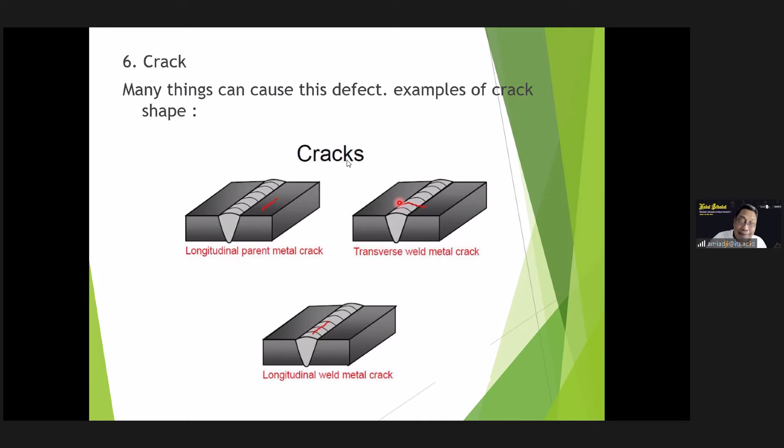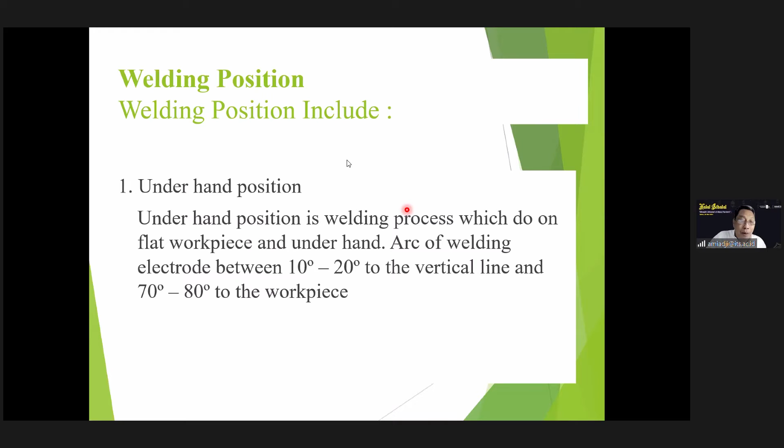Posisi pengelasan itu adalah pengelasan underhand position, berarti benda kerjanya di bawah, benda yang akan dilas di bawah, kemudian elektrodenya di atas. Ini underhand position.

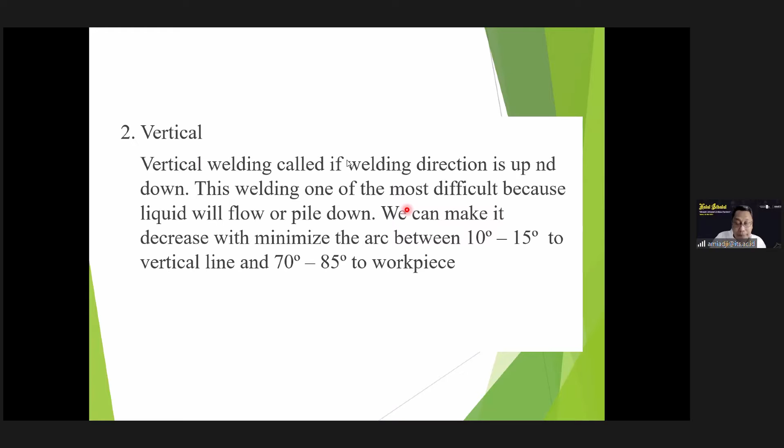Ini vertikal, ya kita vertikal, ngelas vertikal. Horizontal, ngelas horizontal. Kemudian ada overhead position di atas kepala.

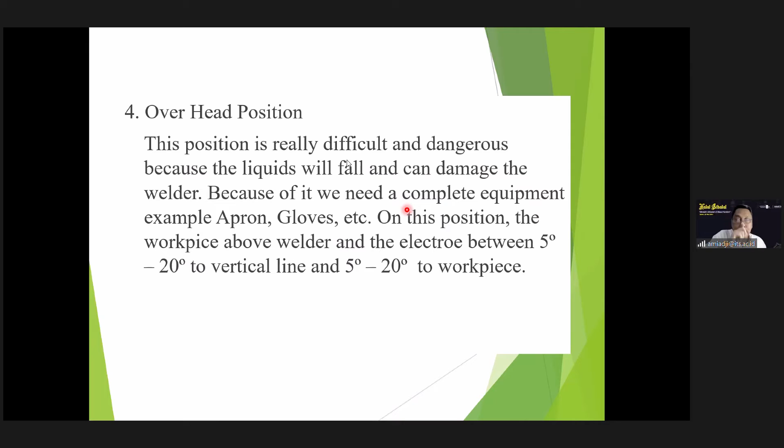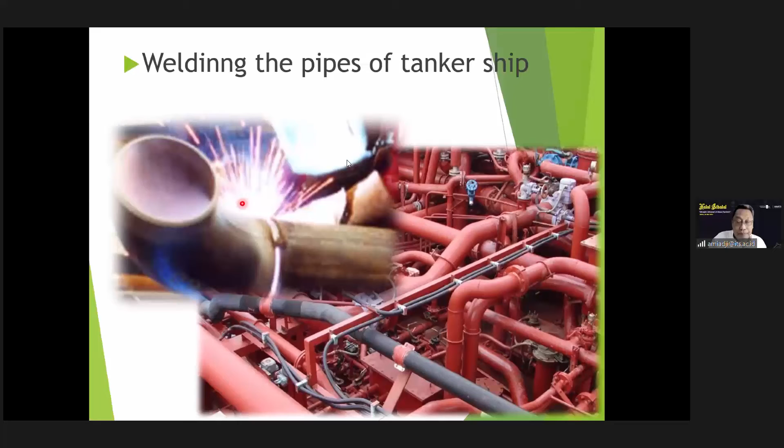Panjang lengan. Nah, kemudian ini pengelasan di bidang marine, di piping-piping. Ini adalah busurnya. Ini ngelas di badan kapal.

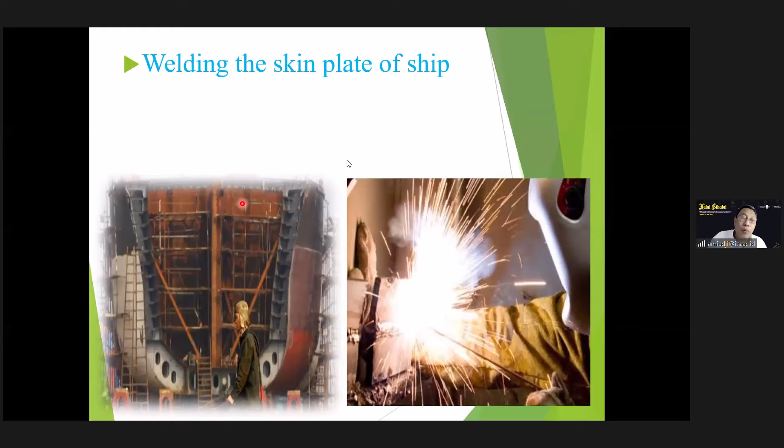Hampir 90% kalau kita menghubungkan material itu biasanya dilakukan dengan cara pengelasan, di kapal ya. Yang lainnya itu bisa dihubungkan dengan apa? Dengan paku keling atau dengan mur baut.

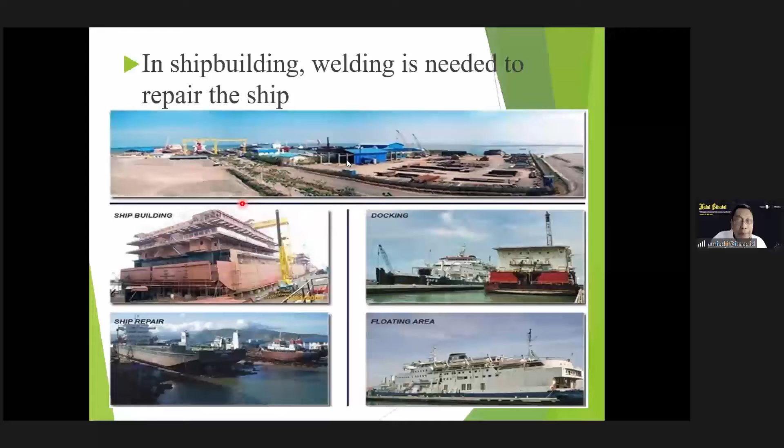Ini di offshore. Ini di kapal. Reparasinya ini. Ada yang mau tanyakan?

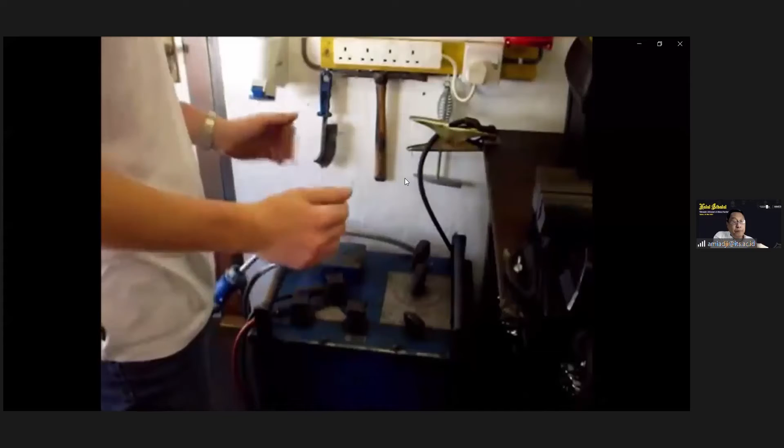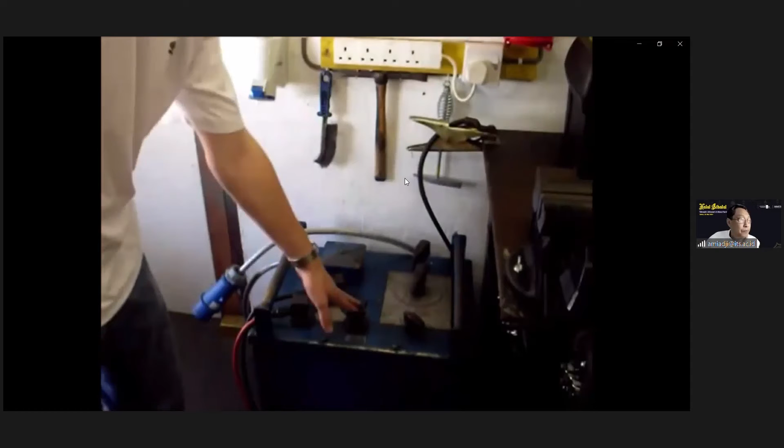Showing you the basics of manual metal arc welding. Now, the most important part of any welding installation is obviously the welder. Now, this model here is an Oxford oil-cooled welder. It's got an output of 250 amps maximum and can accept an input of either 230 volts or 400 volts across two phases of a three-phase supply. It's got a 50 volt output and an 80 volt output. I tend to use the 80 volts because it just makes it that bit easier to strike up.

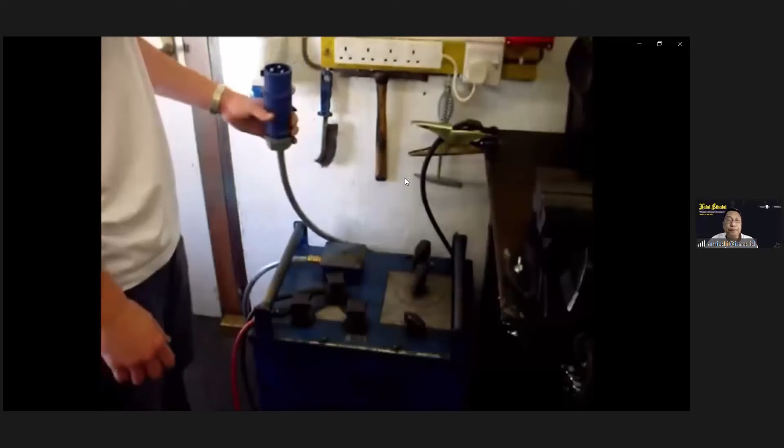Of 250 amps max. The most important part of any welding installation is obviously the welder. Now, this model here is an Oxford oil-cooled welder. It's got an output of 250 amps maximum and can accept an input of either 230 volts or 400 volts across two phases of a three-phase supply. It's got a 50 volt output and an 80 volt output. I tend to use the 80 volts because it just makes it that bit easier to strike up. Now, the welder works as follows. It draws its supply here from the mains.

Ya, kamu sudah tahu gitu ya, tetap minum aja. Ayatullah Rianto. Absen. Hadir, Pak.

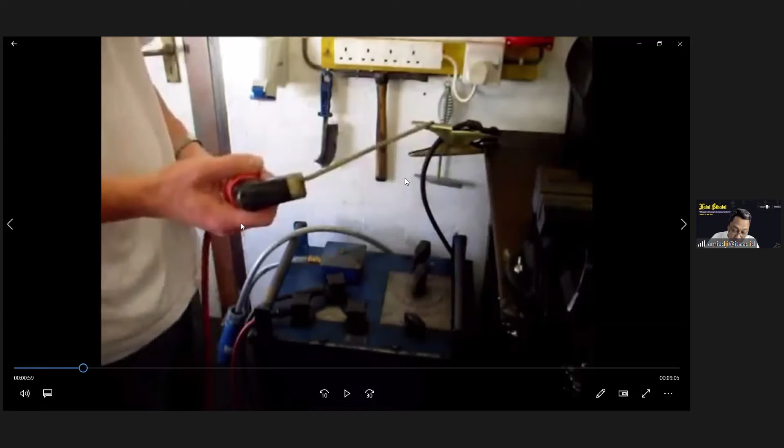Yang dipegang ini apa? Tidak bisa. Ahmad Fat. Penjepit elektroda, Pak. Hadir, Pak. Apa? Penjepit elektroda holder, elektroda. Ya, jawab ya benar. Jawabnya holder, Pak. Harus cepat, jangan lama-lama ya.

Live. This is a welding rod, and this is what you use to strike up on your workpiece. It's comprised of a solid inner core of typically 2.5 or 3.2 millimeters. It's got an outer coating on this thing which burns away and produces a shield gas. Now this is important as it stops oxygen getting to the weld and stops the weld fouling up.

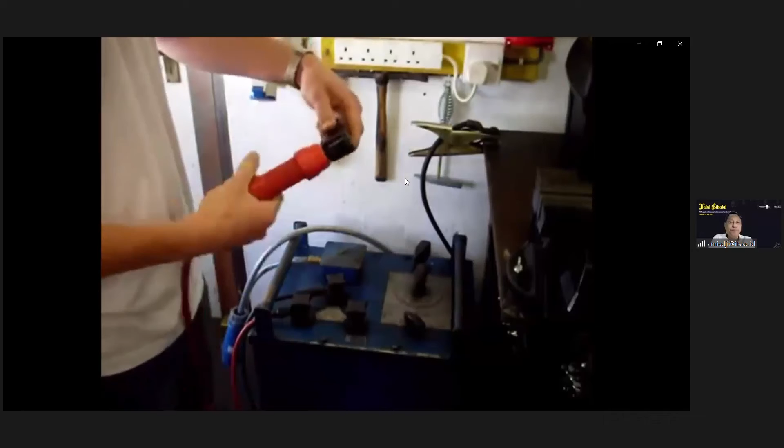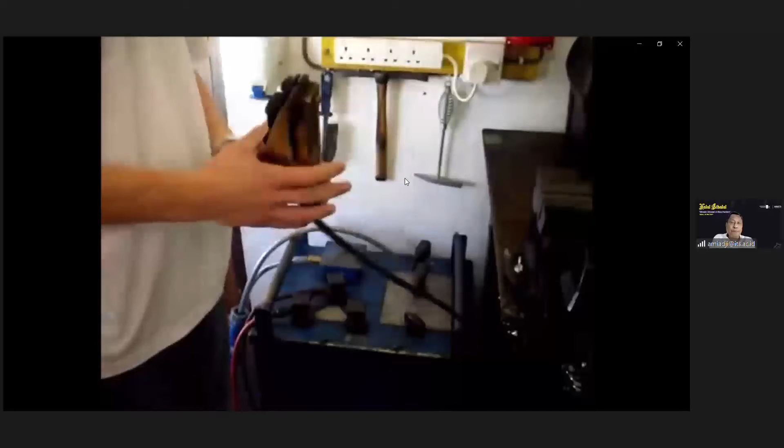The workpiece obviously then has to be grounded to complete the circuit, and that's where your earth clamp comes in. Your workpiece always has to be connected back to the...

Hamad Fatu Jundi. Hadir, Pak. Yang dipegang ini apa? Yang dipegang itu bukannya workpiece connection ya, Pak? Itu klem gitu. Iya, klem yang biasanya dihubungkan kemana? Dihubungkannya ke workpiece-nya atau benda kerjanya, ke mejanya.

Iya, table. Your earth clamp back down here, back down this black wire, back to the welder, which completes the circuit.

Now, there are a few tools that you need to start welding. Obviously, you need a welder and you need a suitable power supply to power it. You obviously need two leads, a ground clamp, and an electrode holder. You also need different types of electrode, which we'll come on to for working on different materials.

The most basic tool of all, though, is a welding helmet. Now, this one is the most basic type. This one has a liftable and lowerable screen on the thing. You can lift it to see what you're doing and lower it down to do the welding. You can get more fancy ones that are light activated and will dim automatically when you strike up. Those welding helmets tend to cost in the region of £8 to £10.

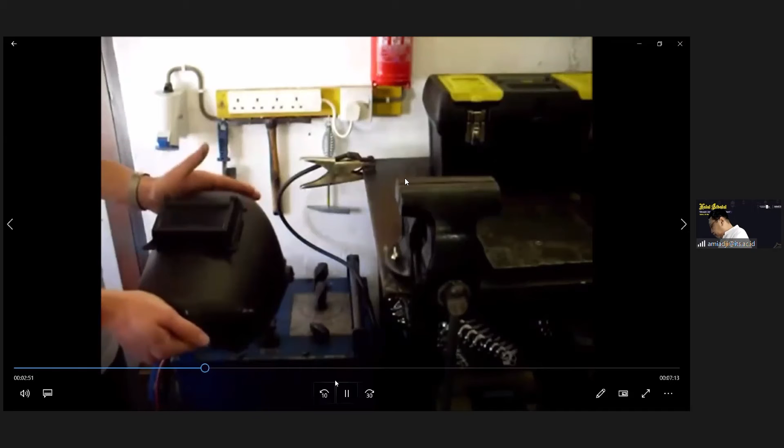The more expensive automatic ones tend to be around the £80 to £100 mark for a decent quality one. You'll also need a wire brush, used for cleaning up the welds after you've chipped off the slag.

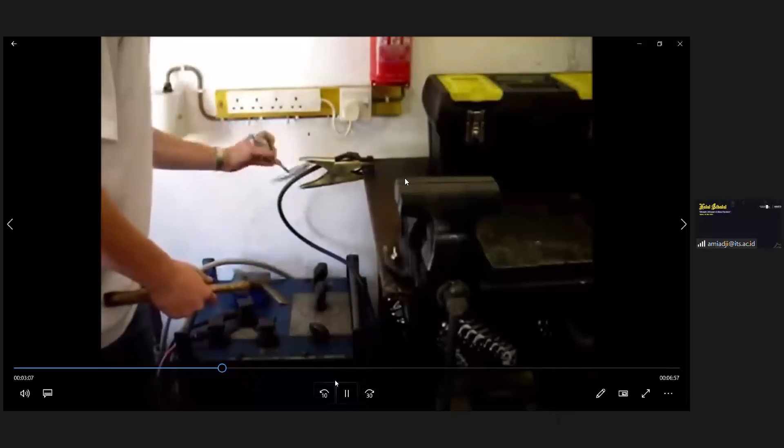Now, chipping hammers you will also need. I have two here, a wooden handled one and a metal sprung handled one. They both have their advantages and disadvantages, it doesn't matter which one you have. This one's easier for heavier duty materials, it's got a bit of weight in it, and this one's handy for getting into small crevices if you're doing a fillet weld or a butt weld.

You will also need a suitable place to do your work. Ideally, a metal vise on a metal bench is the best solution. As I said before, you can ground the bench and ground the vise. You only have to clamp your work and you can strike up straight on it.

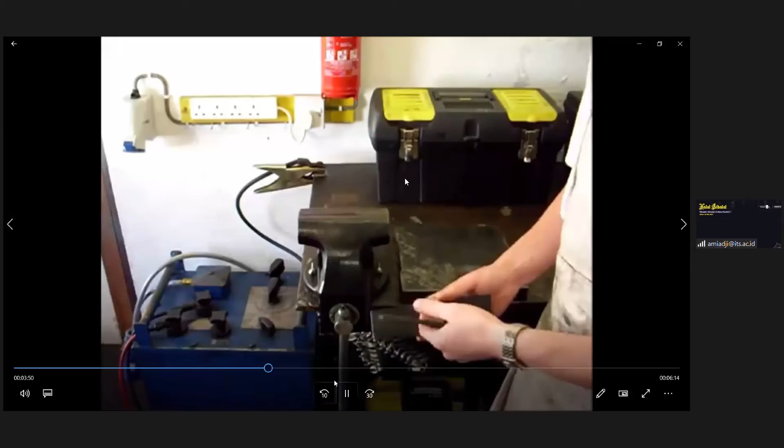Now, the first thing you want to do when you come to weld is look at the material. This is 1/8 inch steel, nothing special, just plain mild steel. Say I wanted to fillet weld these two together here, the type of rod I would use will probably be a 2.5mm E6013 rod, such as this one. I have a selection here.

I don't know whether you can see this on the camera. That is a 2.5mm rod here in my right hand. That is a 3.2, and that is a 4mm rod.

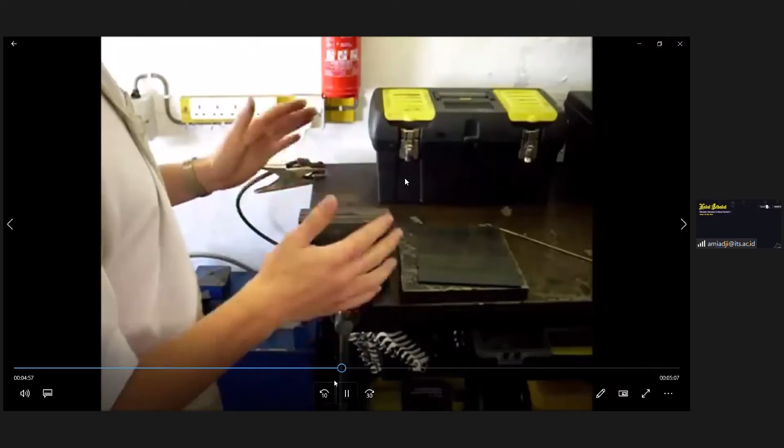The main two things that determine the current are the thickness of the material and the size of the rod. For something like this, I would probably choose around the 110 mark on my welder, and I'm going to set my welder here to 110 amps. The basic thing is you should try it and see what it sounds like, and experience will show whether you need more or less current.

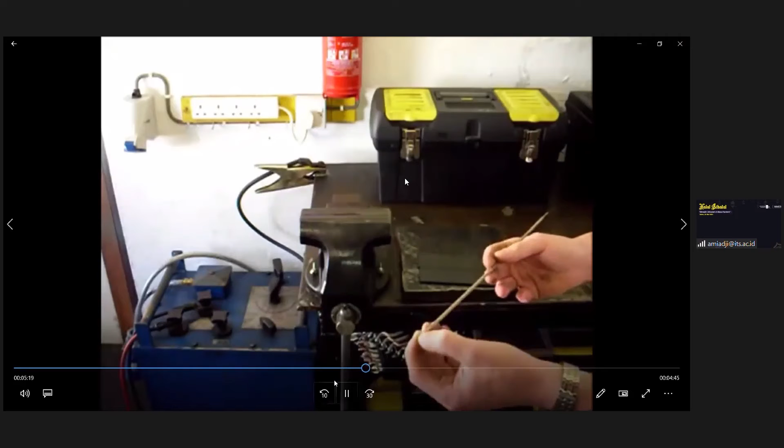Now, I don't want to bang on about safety, but when you weld, when the flux burns off around the rod, it does give off some quite nasty fumes. So you want to make sure there's an adequate flow of ventilation around the work area. Not too much, because you don't want to blow away the protective gases that shield the weld from oxygen. But if you're in a workshop like I am, I've got two big double doors open behind me here out of shot. You want to make sure there is some sort of ventilation, and you don't do it in too confined a space.

Once you've selected your rod, you want to take your electrode holder, unscrew your old electrode, and insert the correct size for the material you're working on, in this case the 2.5 rod. You want to place the electrode holder down, and note that if you place it down here on the grounded bench, when you plug the welder in, make sure it isn't switched on. So I'm checking here that the welder is switched off. I'm now safe to plug it in.

Check the connection is secure. I'm now going to take my welding mask, that can go on and be adjusted. And now you're ready to switch on.

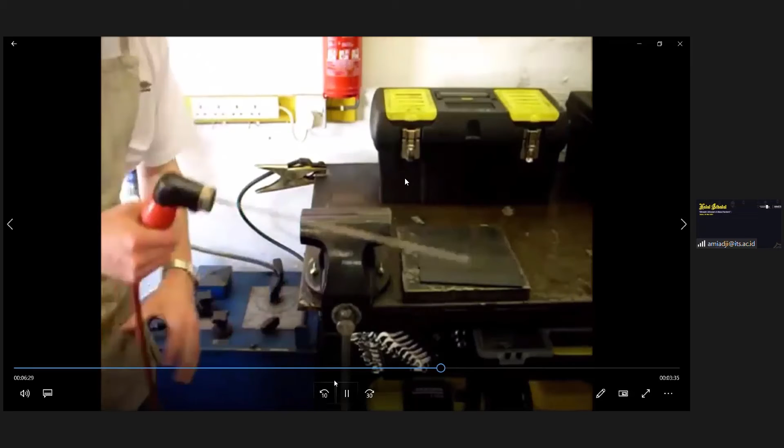Now, the basic technique for doing a fillet weld is to have the workpiece directly in front of you, and you want to always weld with the rod coming back towards you. You want to flick your wrist like that, and keep the electrode at about a 45 to 60 degree angle, always welding coming back towards you in a straight line. Now, I can't show you because I can't turn down the light enough on the camera, but I'll show you the results afterwards. You can pick up the noises on the camera and tell whether the current is too high or too low, with experience. So here goes.

Now, don't make the mistake of putting the electrode down on the bench, because remember, the bench is grounded. Switch the welder off first. Now you can put the electrode down.

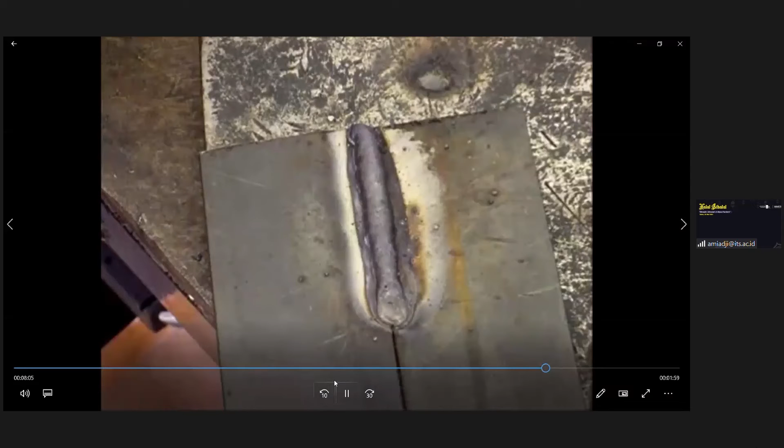Now, as you can see here, the weld is covered with slag. Now, you need the chipping hammer here to break the slag off. Here's a little technique to knowing how good the weld is: the slag should easily break off. It shouldn't have to be beaten to hell to break the slag off, it should be a couple of light taps to break it off.

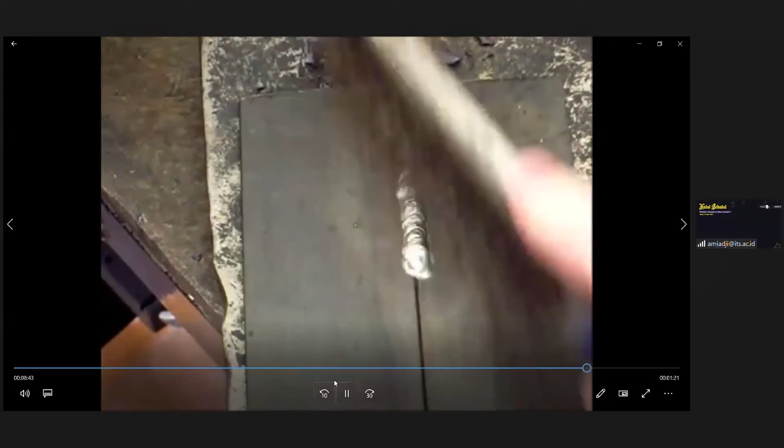The slag should take very little to break off if the weld is good. Now you want to take your wire brush and just clean it off, and there you have it, one fillet weld.

I hope you could hear on the video, but that's about the right sound you want for the current. You can tell the current wasn't too low because the weld didn't bunch up. It's a fairly even coating here, and there isn't too much spatter.

These little pimples of metal are called spatter, which is what's thrown out if the welding current's too high. I hope that's a good explanation for you on welding, and if you've got any questions, feel free to ask. The welder struck up very easily in the video. You shouldn't find that the electrode sticks to the workpiece.

If it does, the most common cause is a bad ground, which means the path of electricity back to the welder isn't good enough. This piece is resting on the work surface and has quite a bit of surface area, but always check the connection to the ground and your connections on the welder if the electrode starts to stick to the workpiece and it's hard to strike up.

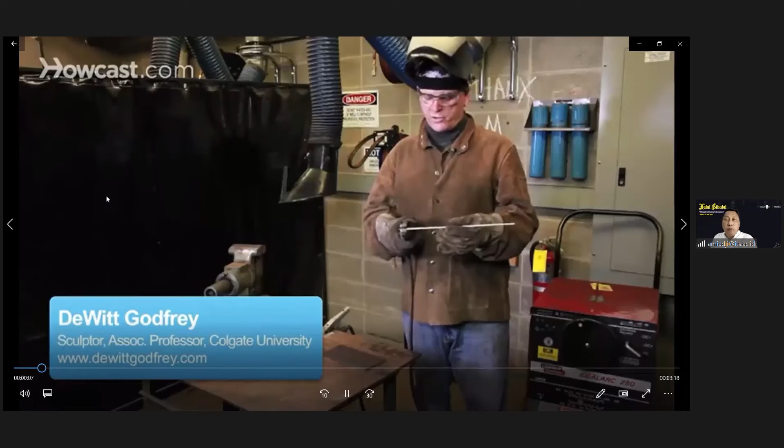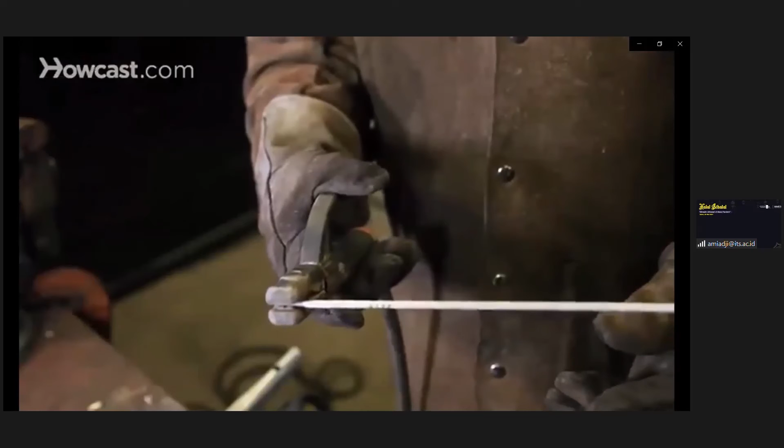This welding rod fits into an electrode holder, which is insulated and allows the operator to safely hold the electrode without danger of receiving an electric shock. The rod can be positioned in the holder in a number of different ways, depending on operator preference or the position of the work being welded.

When the welding machine is on and the ground clip is connected to the steel table or to the work itself, anything metal on this table is now charged. When the electrode makes contact with the work, it completes a circuit. The electricity flows through the electrode holder, down through the work, and back out through the ground clamp back to the welder.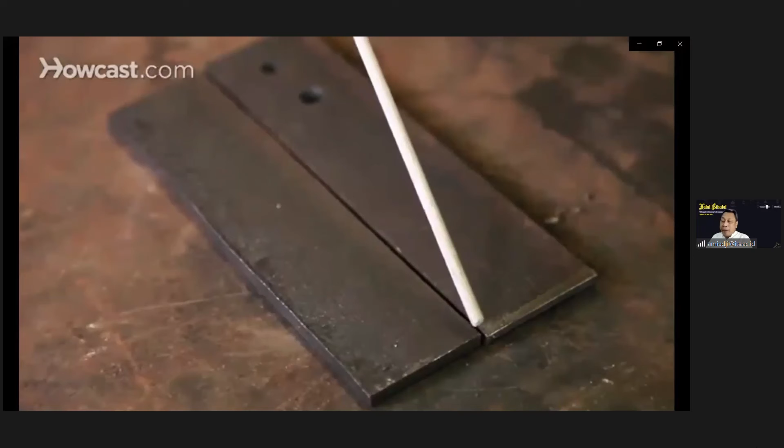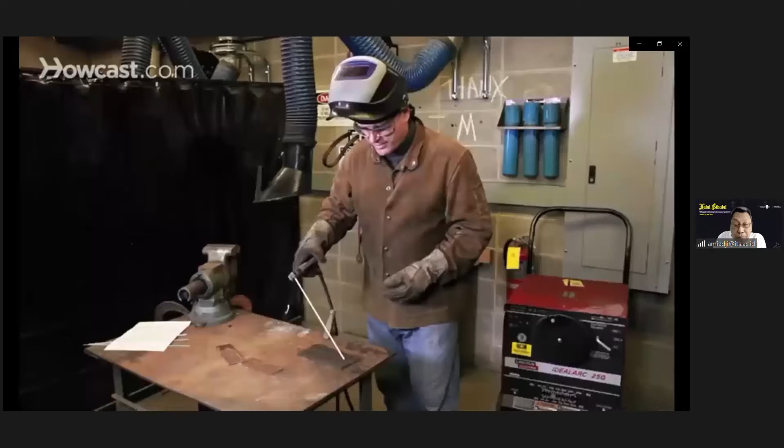When an arc is struck, a common pool of molten metal is created between the two pieces being joined. Into this, the melting alloy center of the welding rod is deposited, completing the weld. One thing to be careful of, as you're...

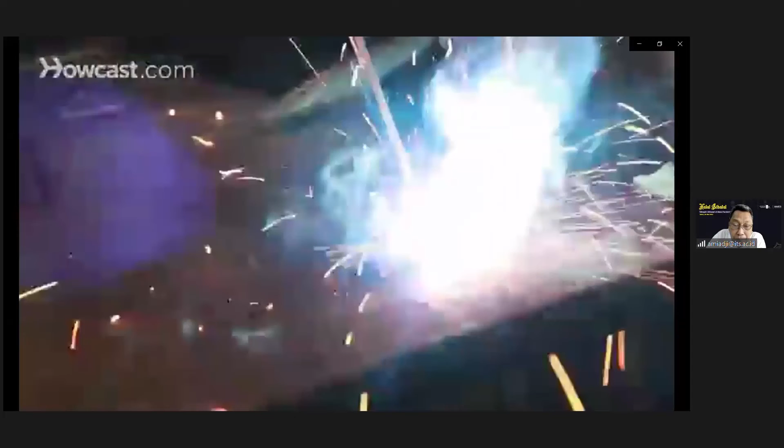Okay, hoods down. After striking the arc, I create a nice even pool of molten metal. You'll notice that the tip of the welding rod stays very near to the arc puddle, and that I'm also slightly wavering the tip of the electrode back and forth. The idea is to heat both pieces of metal evenly as the filler rod is being deposited.

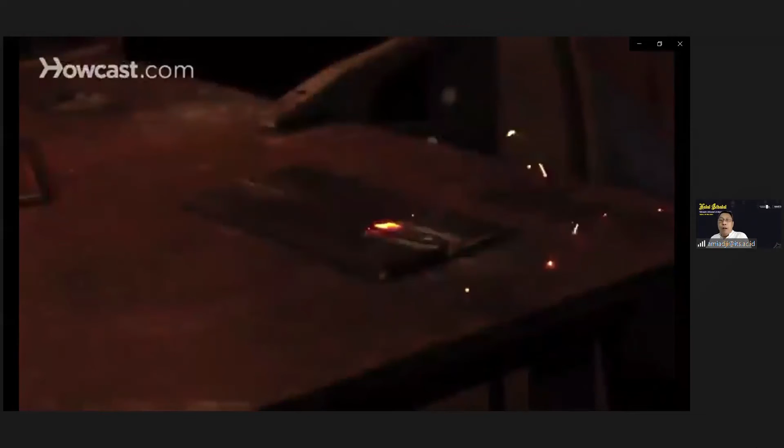Once you've completed your arc welded seam, you'll notice there's a blue-black residue on top of the weld. This residue is a byproduct of the burning flux. It needs to be cleaned away from the weld. You can do this with a chipping hammer and wire brush.

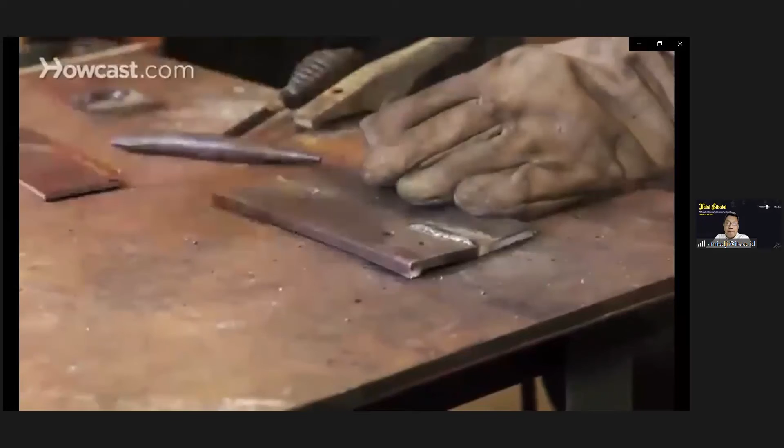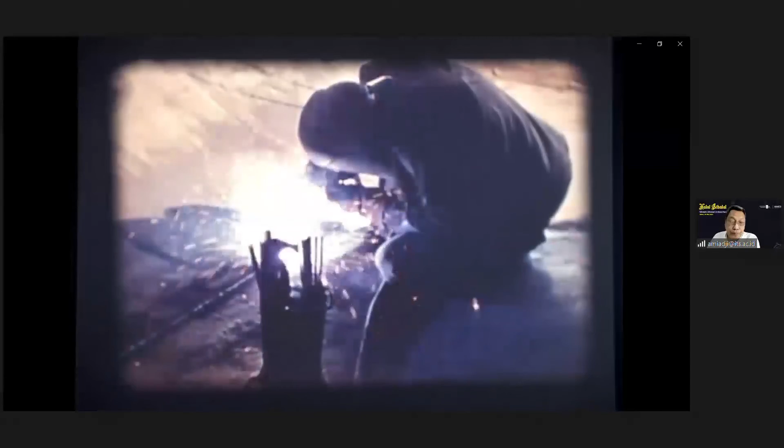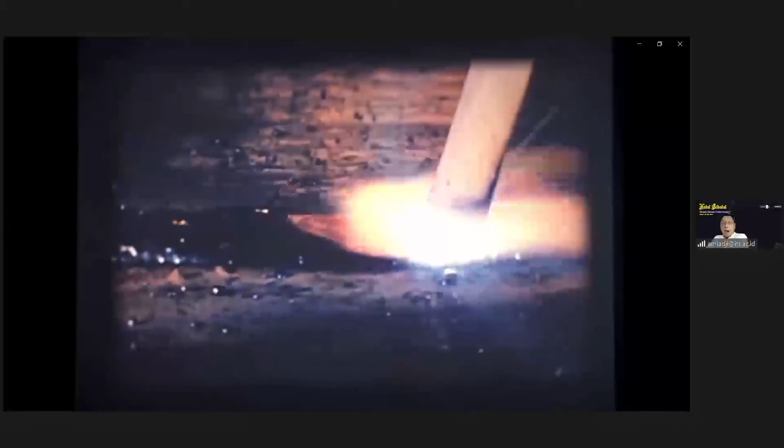Shielded arc welding is usually accomplished by means of an electric arc formed between the work and a coated metallic electrode. Let's see what happens. When the arc is struck, it almost instantly creates a temperature of about 6,500 degrees Fahrenheit. This melts both the base metal and the metal in the electrode. The metal from the electrode is melted off in tiny droplets, is carried across the arc, and

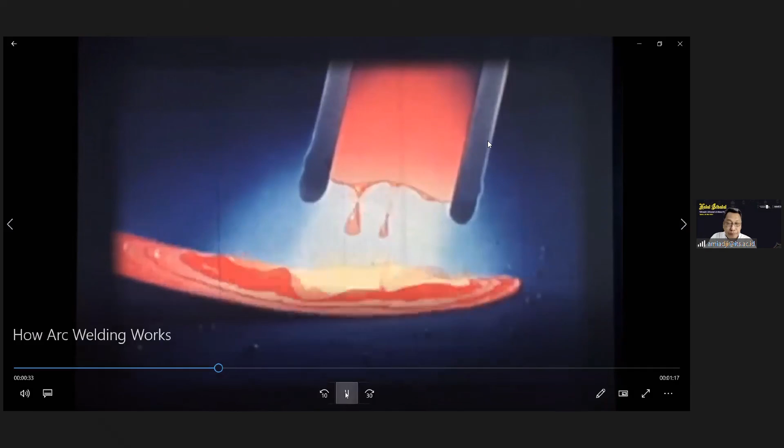mixed with the molten base metal. The force of the arc and the forward travel of the electrode causes the mixed molten metal to be pushed to the rear of the crater, where it cools to form a bead. The movement of this metal toward the rear of the crater and the depth of the crater are an excellent check on the quality of the work. The operator should learn to use it as his guide.

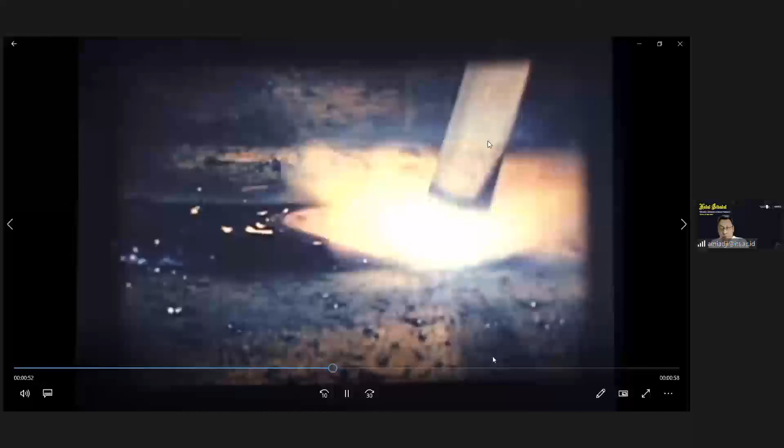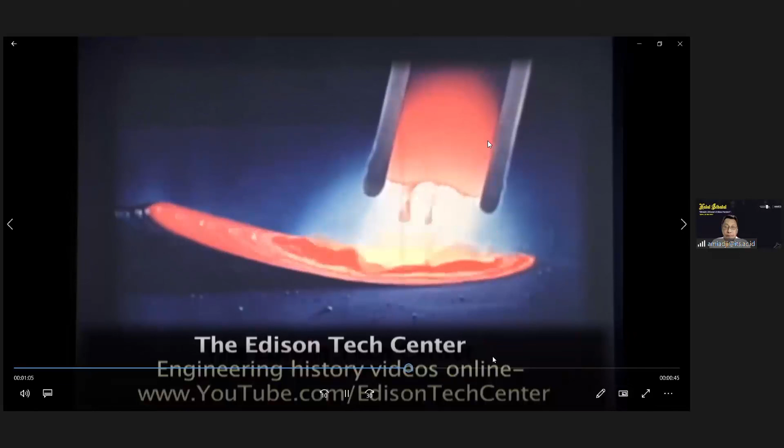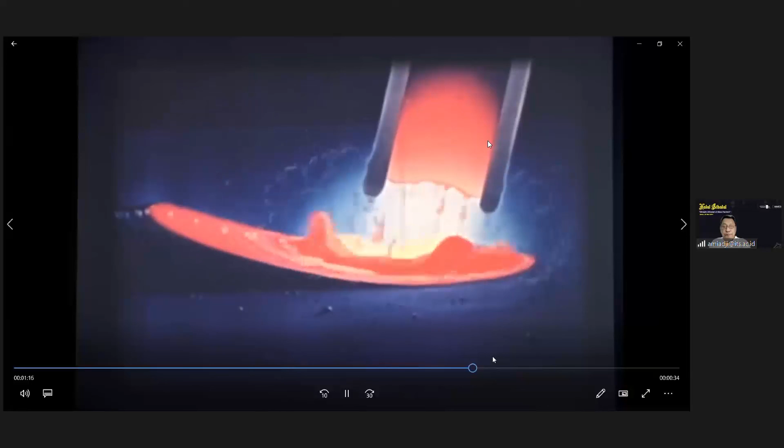At the same time that the metal is melting, the coating on the electrode is being consumed. This takes place slower than the melting of the electrode, which shields the arc and helps direct the flow of metal. It also permits the use of higher currents, with the resultant faster deposit of weld metal. A gas is formed, covering the arc with a protective shield that prevents the exposure of the molten metal to the air and therefore prevents the formation of harmful oxides and nitrides in the deposit.

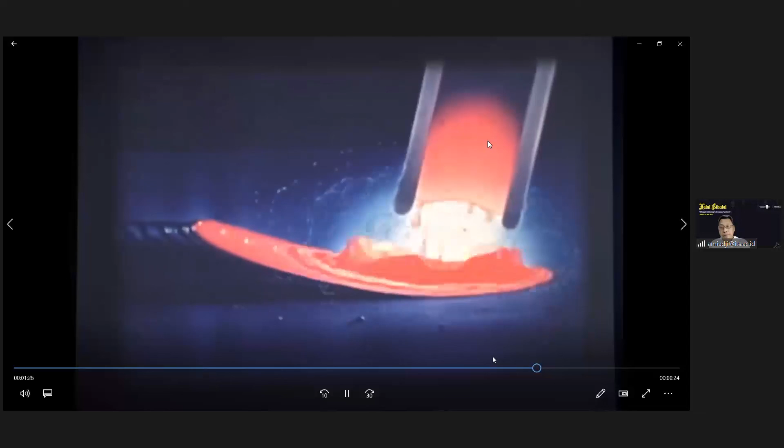Also from the coating, chemicals acting as cleansing agents enter into the metal to help to remove the impurities. These chemicals with the impurities float to the top and, cooling, form a coating or slag over the bead. This slag causes the molten metal to cool more slowly and has an annealing effect. The flow of metal.